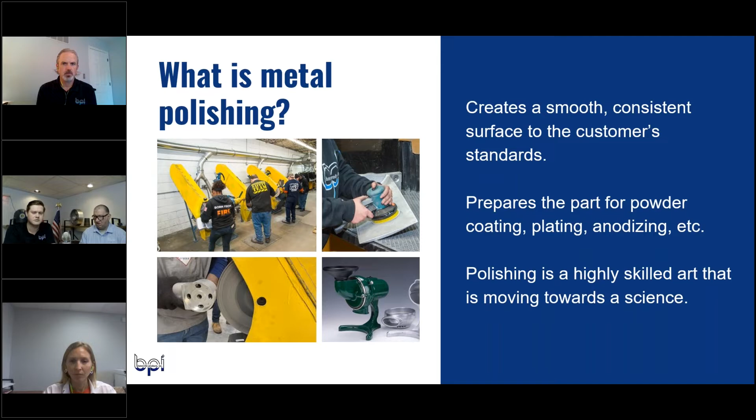And we did have our first question that came across from Chris. He said, do most of BPI's products have a polishing operation? Good question. Most of them do have a polishing operation, but there's a few that don't require it, very few. So what's the goal behind that? Is it because those few come out of the mold ready to go, or is it industry specific, product specific?

Well, actually, it could be machine finished, or it could be just a rough trim of the gate. And stuff, and leave the surface as is. It's a product finish. Sometimes the parts can be hidden and you don't see it, so nothing shows. It just becomes a form, fit, and function part rather than a high cosmetic visible to the end user. Make sure the function's all right on it.

So you mentioned some of the different tools that you may use, whether it's a DA for some of the powder coating or some of the buffing tools. What's the difference between grinding versus polishing?

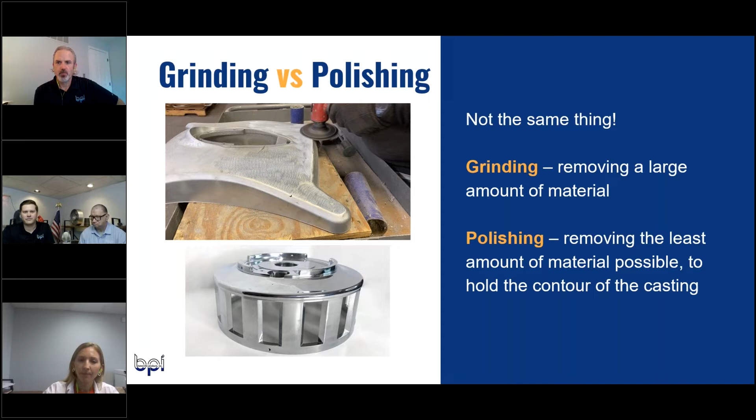So you mentioned already the DA. Go into a little bit more detail on what different types of polishing tools you use, and maybe some of their end applications on the product that some of that stuff is used for.

So, the polishing tools, I can use a 90 die grinder. Use die grinders, and that's like getting flash where the belts can't get. Then the sand rolls get in corners where the belts can't get.

So when would you use a polishing jack versus a die grinder or DA? Well, DA, we also polish the parts before we DA them, to get it down to where the DA can smooth it out and make it look good.

But like this here, it's all polished, no DA on it. But most of the time, all aluminum gets DA'd.

So you're using the polishing to take down more material, and then the DA is really the finesse side of it? Right. You're taking off all the rough surfaces and things like that, making it nice and smooth so the DA can just put a smooth finish on it.

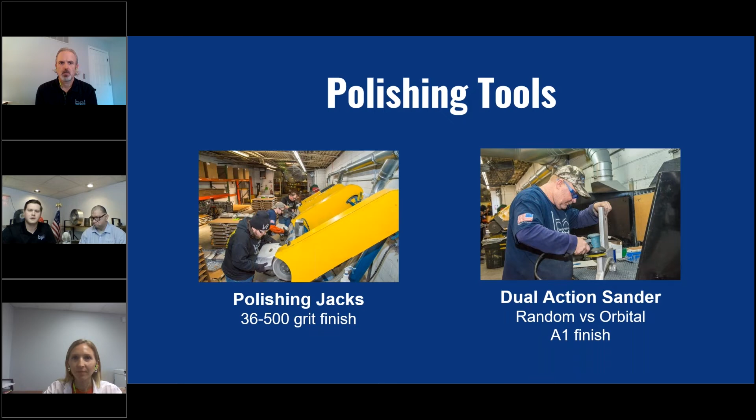Hey Tim, I got another question. They wanted to know how much the part dimensional tolerancing is affected before and after the polishing. It's a good question, so I'm assuming they want to know something about the prints. So whether you're applying using a polishing belt or you're using a DA sander, how much of that overall tolerancing can you affect with those different tools?

Oh, you can, if not trained properly to do it properly, you can mess it up pretty quick. Yeah, if you're using like a 36 grit on something that's got a lot of tolerance, you're going to take off too much. Whereas on the DA side, you're just trying to finesse it, it's not as coarse, you're not taking as much off and it doesn't affect the tolerance as much. Even on that belting side, you may risk, if you have a very coarse grit, really risk taking off a lot of that part.

Very easily. Okay, well tell me a little bit about stainless steel shot blasting, and what is that typically used for? Well, that's typically used to deburr the casting if it's got any little burrs in it, but then also to put a nice finish on the casting. It looked real good, so it's typically used for a consistent finish.

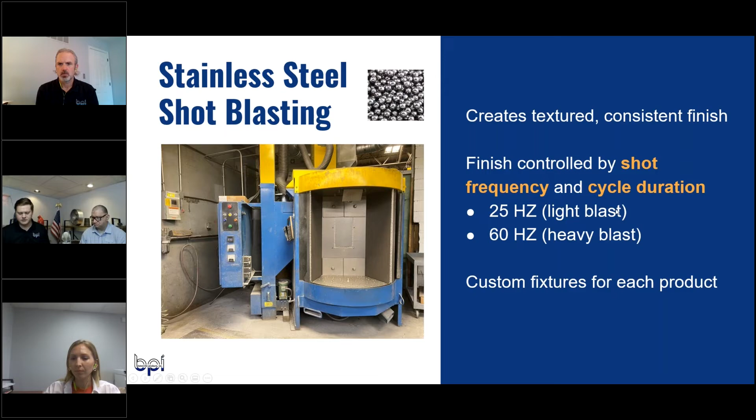Let's now talk about our polishing robot. Yeah, that's a very good point.

Early on in these slides, we talked about how it is a little bit more of an art than a science, especially when it comes to the finessing of the product. But even nowadays, we're seeing more robotic polishing here at BPI and across the globe. What are you seeing from the robotic polishing?

Tell me a little bit about your experience so far. Well, my experience so far, it is working out. There's still a little bit of bugs, but it is taking some weight off the guy, the employee, and applying it on the robot. It helps out. So you're talking specifically about ergonomics? Yeah, that's the biggest impact you guys are seeing then? Yeah, that's awesome. I mean, it also helps a lot on the polishing aspect.

Okay, yeah, I'll speak honestly too. When I first heard about robotic polishing, I thought the same thing. I was skeptical - it's got to be an art, right? Yeah, this whole thing's an art. But I think what we've seen from robot polishing is really taking a large chunk of that weight and that work off the people in the department, getting it a certain percentage of the way there, where you're still coming back, maybe sometimes finessing it, but not all the time - it could come off complete still. Very nice.

Yeah, it's working. I have a question. So are you able to polish a part complete with the robot, or do you still have to use some hand finesse towards the end of the product? How does that work? They're still working on that. It can be done, yes.

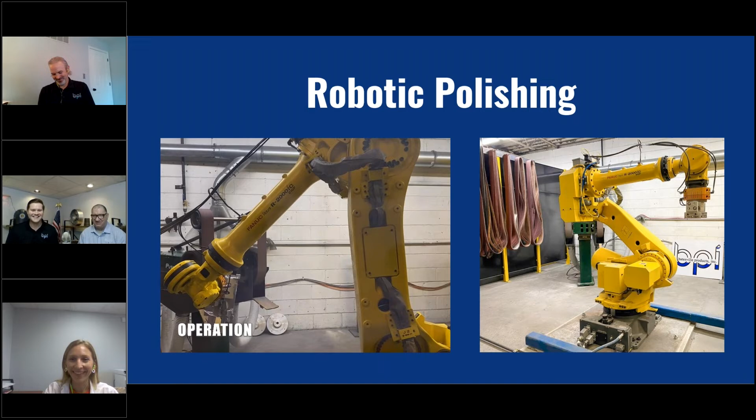Hey Tim, we had a question about powder coating. What specifically are you looking at when you prep a part for powder coating in the polishing department? Let me rephrase that - what are you doing to the part to prep it for powder coating? I'm putting a nice, smooth finish on it to prep it for the powder coating.

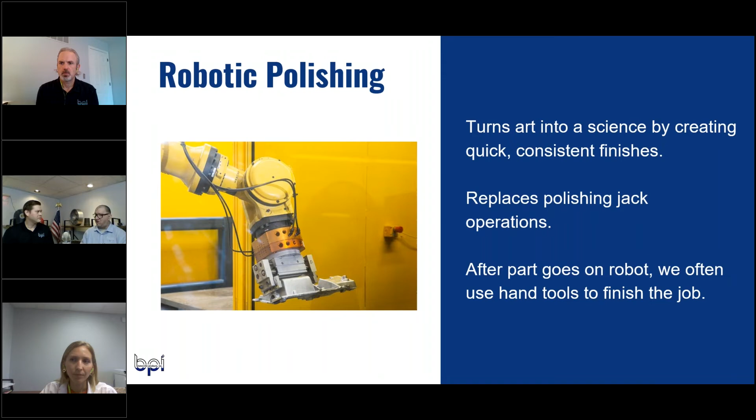Are you taking a little bit of material away too, so the powder coat can catch to it? Right, it's got to be kind of - you can say roughed up, but it's smoothed out, so the powder sticks better. Yeah, because it's still a very consistent finish. Right, it's very consistent, and you're doing different things with different parts too. Yeah, if you leave any gouges, it'll show out. It'll pop up in the powder. Okay.

So we talked a little bit about robotic polishing, but let's get into the finishes that you achieve and why you're going about that route. Talk me through some of the finishes listed there and why you may use one versus the other, and what your end result outcome is. If maybe you use a grit belt that's a 500 and then use a stainless steel shot - give me a scenario of one of those parts shown there, of what operations you're walking through and why.

What's the outcome from it? Well, like the modular crown module, we use a 36 grit belt to take off the gating and the flashing. That's all that's required. Then we DA the top of it. Then it gets shot blasted, stainless steel shot blast, so the surface will look the same all the way across. So your end result is a consistent finish because they machine it, powder coat it, and it's put on.

So what you mentioned a lot about zinc versus aluminum, what's different with zinc than you would see when you're polishing aluminum? Well, zinc actually is softer to me, and if you really go too hard on it, you really mess it up real quick. Aluminum you can finesse a little more, but it does get hotter than zinc quicker when you're handling it. It's just one's a little bit softer, and the other more durable, I should say. Aluminum's not as durable as the zinc.

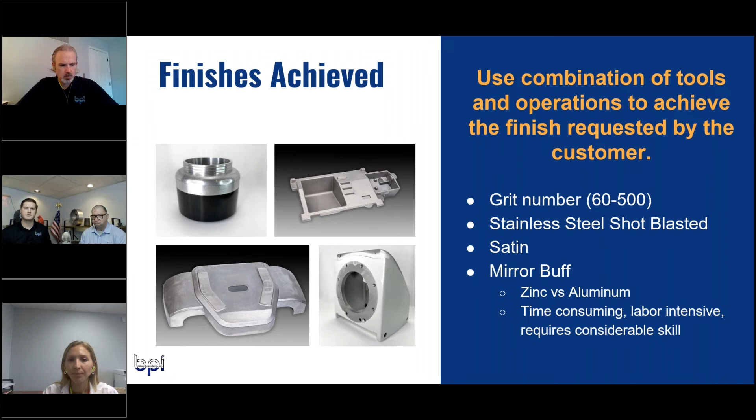And is that because the metal's getting too hot? Right. Interesting. But I could actually take anything you want and make it look like a piece of gold. There you go, I like that.

So that's a nice little segue into defects. You talked about the tadpoles, if you get the aluminum too hot you see tadpoles in the metal because it's starting to pull the metal a little bit. So what are some defects that you see, and how do you correct them? Well, like you see a porosity hole, a gas hole in a part, it gets welded. And shrinkage, like a dip where the metal ain't forming all the way out of the mold, that can be welded too, or fixed with Devcon putty.

So you talked about two different solutions outside the polishing department. If you see any kind of crack, shrinkage, or porosity, what happens if you try to polish that? You ruin it. So it makes it worse? You destroy it. Because like I said, you can take a lot off, but you ain't gonna put that metal back, not even with welding it.

So really from the porosity perspective, you're trying to solve that on the casting side before you get it into the polishing department. While you can use that putty, or even add welding, oftentimes you try to solve it on the casting side before you get into the polishing side of things. Right.

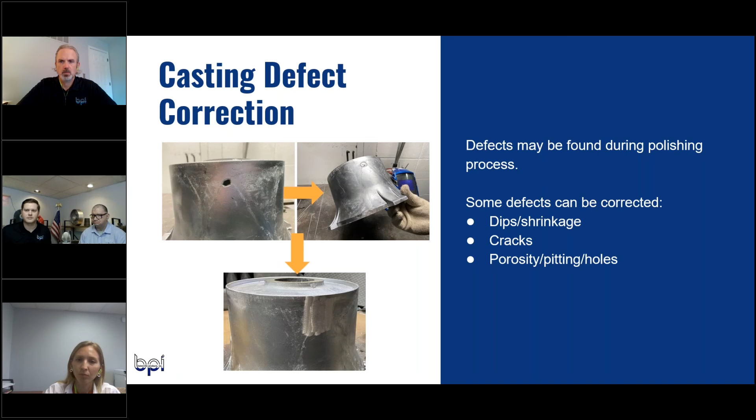So you had mentioned already from the robotic standpoint, a lot of the ergonomic benefits. What focuses in your department are you guys typically looking at in terms of ergonomics, and what are you seeing now or in the future as potential solutions for that process?

So that's making it waist level for your team? Right, so they're not having to bend over, even on heavy parts, not having to pick it up and bring it back to waist height. Even on lighter parts, because you bend over 200 or 300 times, it gets to you after a while. After 40 years? Yeah, no way.

What else are you seeing? So I mentioned the DA updraft or downdraft tables. They're waist high, right at the level where you can just sit there and work, and it's directly taking all that dust out of the process there.

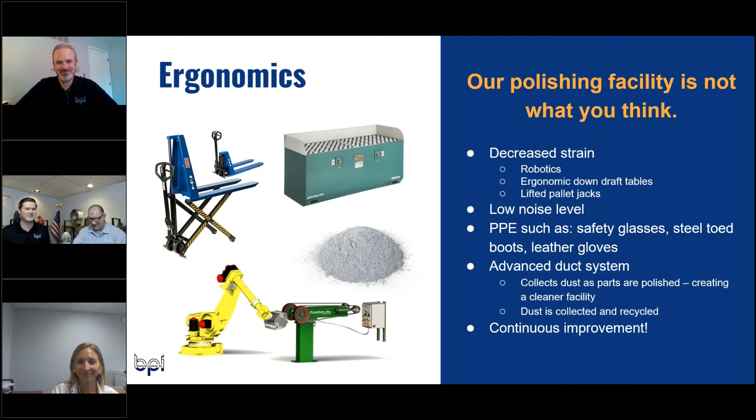Outside of that, besides the downdraft tables, it's important in any polishing department to have a proper duct system in place. Oh yeah, you don't need a mask in ours or anything because you don't feel the dust going down your lungs, it sucks it all up, it's right there. Very nice. Yeah, it is. After 40 years, I'm sure it's important. It's important.

All right, is there any other questions coming through? We had a fun one here. It was for Danny. What's your favorite polishing operation? Ooh, after 40 years, my favorite polishing operation would be buffing. Is there a specific part? Yeah, the stator.